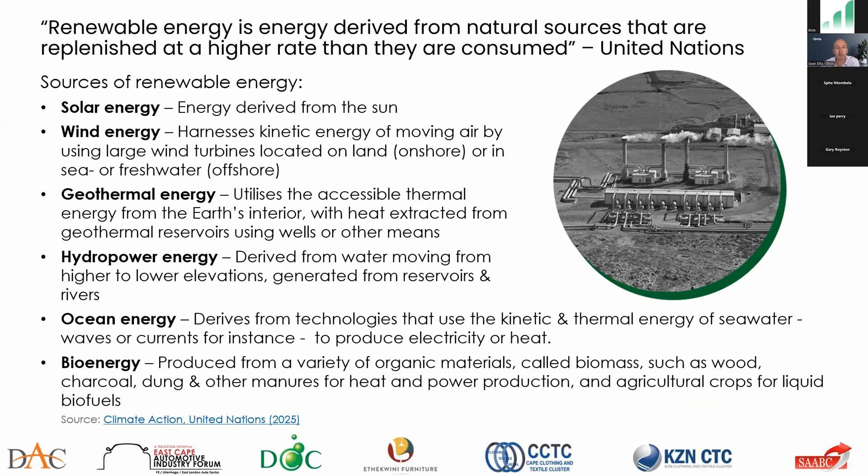There's also geothermal energy, which utilizes the Earth's interior, where heat is extracted from geothermal reservoirs using wells or other means. Hydropower, most of us have heard of as well, derived from water moving from higher to lower elevations, generated from reservoirs and rivers. There are examples in South Africa where dams generate hydropower, which is a form of renewable energy.

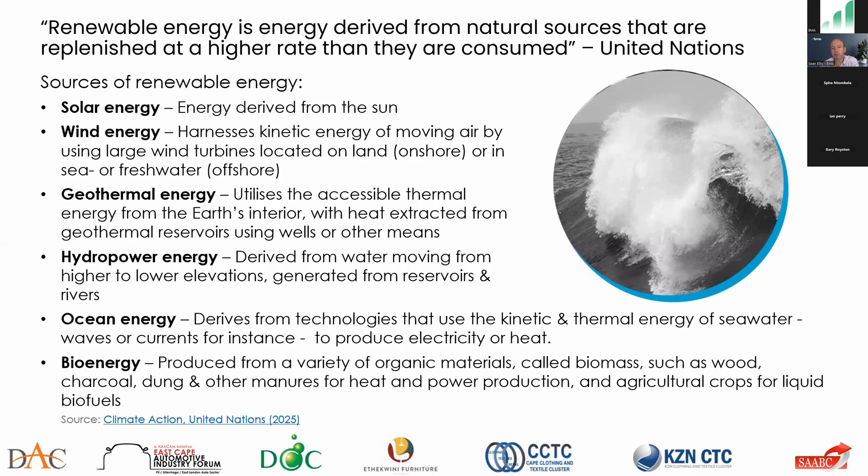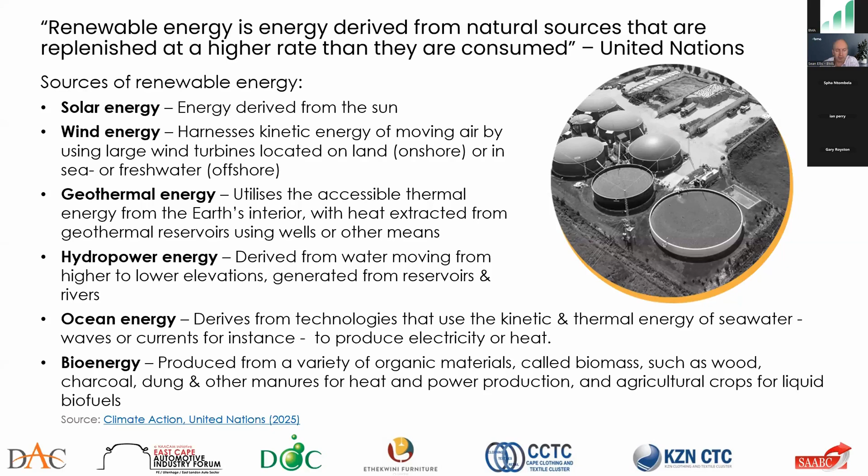Today's focus is on South Africa specifically, and renewable energy has become a very hot topic in South Africa. This is largely linked to the reliance on fossil fuels on the one hand, the need for replenishing energy sources, and the need to reduce carbon emissions on the other. Ultimately, there is a dual focus on finding alternative energy sources, and renewable energy is that alternative source.

In terms of some of the advantages viewed with the adoption of renewable energy in South Africa: it reduces reliance on fossil fuels, creates jobs specifically in the green or renewable energy space, improves energy security—you're able to manage your own energy to a large extent—reduces the cost of electricity and carbon emissions, improves air quality, can support rural communities by generating energy for them, supports economic growth, protects water reserves, and ultimately protects the environment. So these are, at a high level, some of the advantages of renewable energy.

In terms of the reasons, what are some of the justificational reasons firms look to adopt renewable energy? I've listed some there, based on international research. At a global level, incentives would be drivers towards adoption of renewable energy, along with environmental responsibility, energy dependence and security which we've alluded to already, technological advancement, and competitive advantages. These are viewed as some of the global drivers to the adoption of renewable energy.

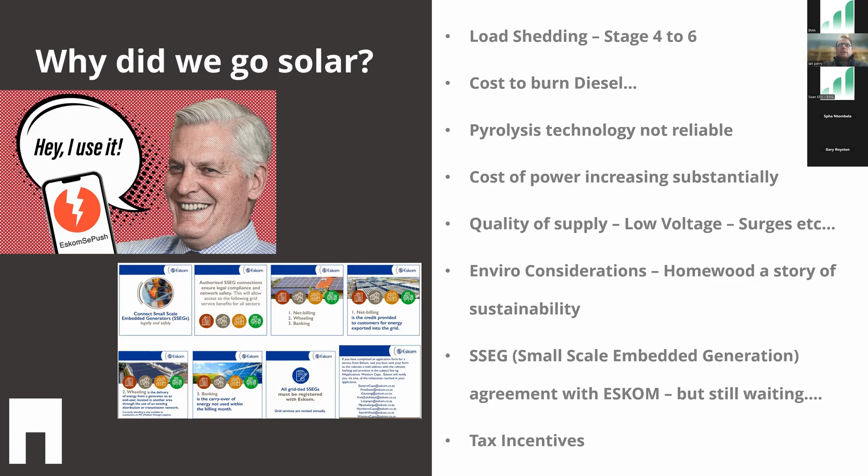So the journey, once we had decided we're going to go solar, the first thing we did was collect data via an independent contractor. They came and put a meter inside our main DB box, and the idea was to measure our load for at least 3 months to see how much solar we would need to generate to at least run a day shift within our operations.

With that data, we then went to various solar suppliers and got various quotes. Once we got the quotes, we had to look at the financing decision, whether we're going to lease to own, finance via a loan, or pay it cash outright.

So we selected a really good supplier called TRRC. They came in as probably not specifically the cheapest, but in terms of the product they were offering and the service they were going to offer, we selected them as the best candidate.

We then went the route of financing via a loan, through the DTIC and the Furniture Competitiveness Fund, which is administered by the IDC. The reason we went that route was the exceptionally low interest rates once we put all the various blend of products together that was on offer. But just a word of warning, if you do plan on going this route, especially getting finance through the IDC, it's an exceptionally long process and very, very arduous.

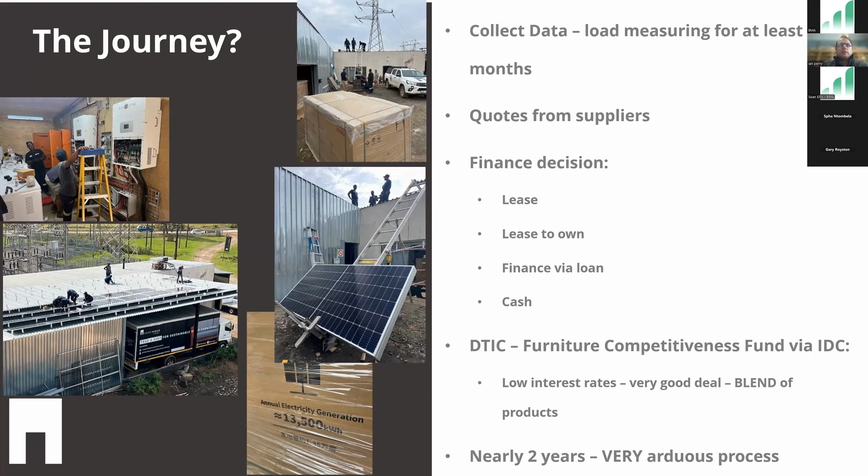Okay, so performance thus far. Our solar system has been in use for the last year. We actually commissioned it in May last year, and this is what we have generated thus far.

Keeping in mind we have a day and a night shift, our PV generation came in at 92,000 kilowatt hours for the year, and our total load was 162,000 kilowatt hours. So our PV generation took up probably 56% of our load, which is exactly enough to keep our day shift going without having to use Eskom, whereas our night shift was fully supported by importing from Eskom.

So I would say in terms of our objectives, it has definitely achieved what we wanted, and is definitely paying back the capital expenditure that we put in.

Quite interestingly, some other stats: our highest production via the sun was in July and October. Obviously the less rainfall you get, the more sunshine you get, the more PV generation you'll get. Interestingly, in those months, if we were attached to Eskom via that SSEG scheme where we could pump back into the grid, we probably would have generated a lot more in terms of PV. Because with this system, if you aren't linked to the grid, once your batteries are at 100%, the PV will match the load, and in some cases our load will average about 70 to 80 kilowatt hours an hour.

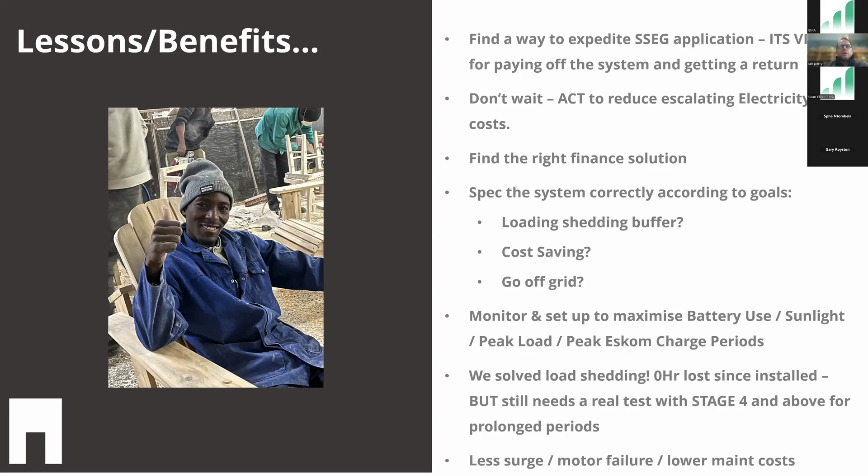Right, so going forward, yeah, our SSEG approval is almost there. Once we get that sorted, we can use Eskom pretty much as a battery over weekends and on sunny days when we're producing excess power. We are also going to be investigating pyrolysis going forward, trying to utilize some of our biomass waste out of the factory a bit better to produce energy.

Our suppliers of our solar system also recommended various things for improvement after monitoring for the last year. One of them was capacity expansion - the big thing with the solar system is if you can maximize your PV capacity, that's great. We will look at doing that in the next year or two to try and get some more solar panels on the roof. Make sure your load management is good, and make sure your battery operation is optimized.

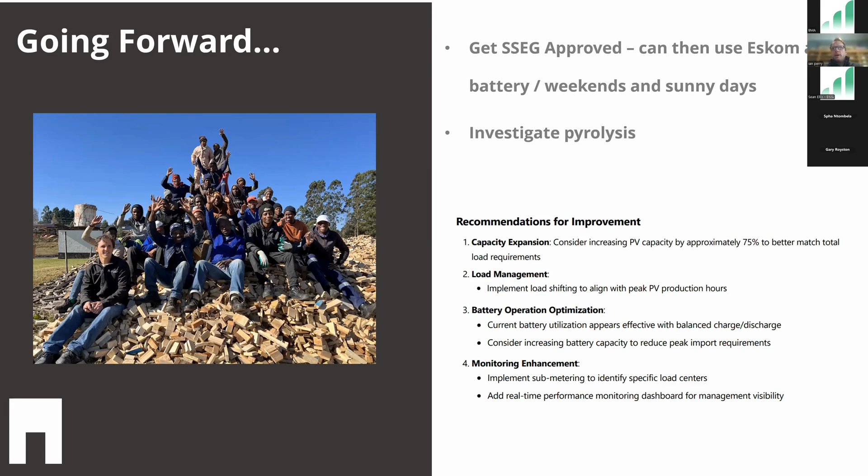So implement sub-metering to identify specific load centers, and then add real-time performance monitoring dashboard for management visibility. Right, and that's it from Homewood.

Thanks, okay, thanks Sean. Good morning, everyone. Just first of all, thanks for the opportunity to share our journey. Ian, I think our journey, as you'll see here, is strangely very similar.

We've seen some very similar problems. Our stories are very similar when it comes to morale, costs, tax incentives, and quality of supply. This is almost going to look a little bit like a repeat, but anyway, this is our story.

First of all, who are we? Webroy is a family-run business established in 1975. We are based in Pietermaritzburg in our facility, which is about 5,000 square meters. We're currently employing 80 staff. Our market, we are predominantly an automotive component supplier, supplying into Toyota, VW, Ford, and Isuzu, predominantly as a tier 2, although we are tier 1 direct to some of those OEs.

Our products and services, as you can see on the right-hand side there, we are essentially a wire company. So we bend pieces of wire. Those take many shapes, sizes, and forms. It could be a spring, which most people will recognize, but it could also be an entire wire seat frame, which you can see in the picture there. We do overmolding or injection molding, some metal pressing. We have an epoxy coating line, and then some welding services - robotic welding, be it CO2 or projection welding. But essentially, we're an automotive component supplier.

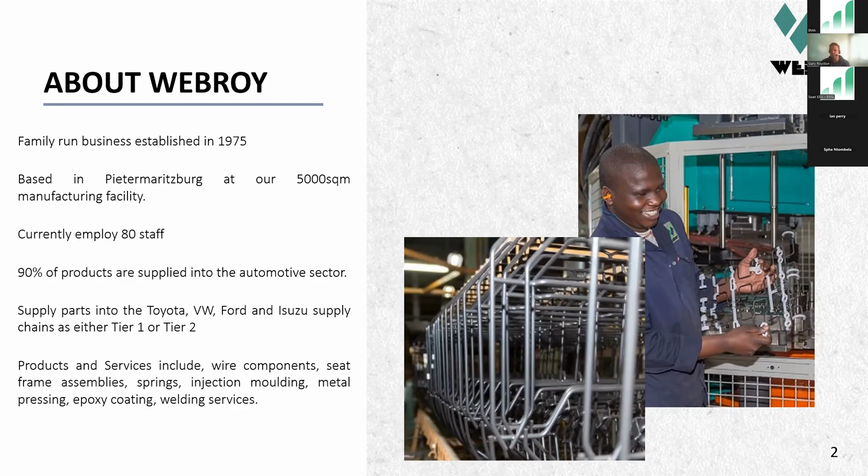Our journey actually consists of 2 phases. We had a first phase in March 2020. In fact, the system went live just before lockdown. That system was 129 kilowatts. It was purely solar panels and inverters, so no batteries at that stage, and it was part of a cost reduction strategy. We did at the time look at batteries and battery storage, but it was just not financially feasible at that point in time, given our power consumption and the cost of the batteries.

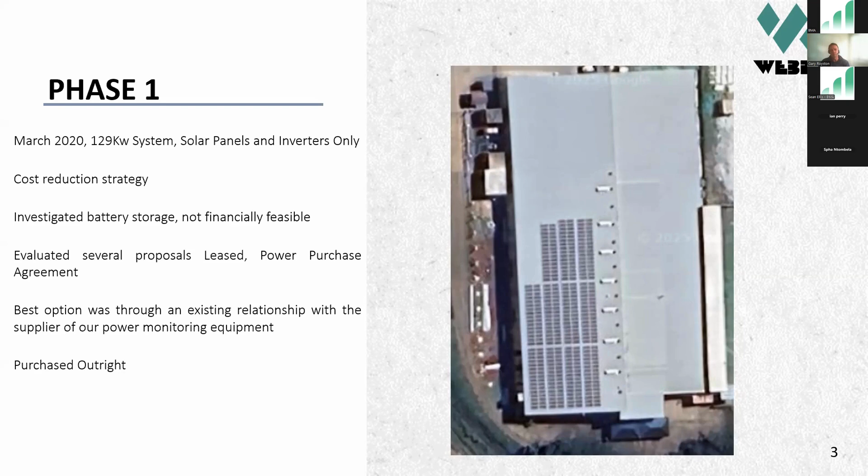We went through a similar process where we did our evaluation. We looked at how we were going to finance it, leasing it, power purchasing agreements. In the end, we decided to purchase the system outright. In terms of evaluating suppliers, we looked at a number of different potential suppliers of the solar, and landed up with an existing supplier who had provided us with some monitoring equipment. So our first phase again was to monitor our usage and consumption, and that supplier would also do solar panels. We had a great relationship, their work on the monitoring had been fantastic, so it was a natural progression to use them for the solar panels, given that the pricing was correct.

So why did we move, or what were the struggles? It very quickly became clear after our first phase that yes, we were seeing some cost reductions, but we hadn't solved the whole problem. We had an energy security problem - while the grid was down, the solar wasn't producing, so we were still experiencing load shedding. The frequency and duration of the outages on our municipal infrastructure was increasing. We were having anything from 2 hours to 5 days, which when you're trying to run a manufacturing business, a 5-day outage is just unsustainable.

Along with that, we did have a generator, so our diesel costs were increasing, our generator costs were increasing, and not only the costs, but more and more from our automotive customers, we are having to align to their carbon emissions and sustainability goals. So while we're trying to improve on these, we're burning diesel in the generator. We also had some staff problems - you can't blame the staff, they've just arrived for a night shift, and an hour in, the lights are out, and we're asking them the shift's cancelled, we need to go home. It wasn't creating a really positive environment in the factory.

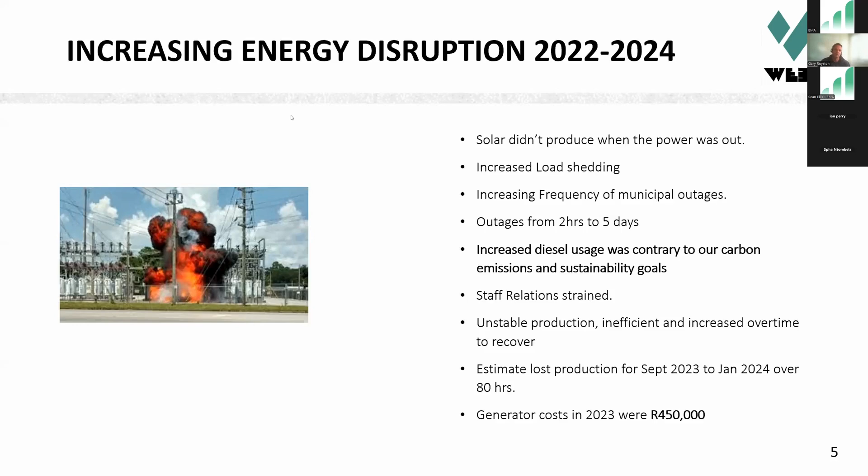So this picture is why we decided to look at other options. We started by looking at, well, should we move? Because a large part of our problem was infrastructure related. We quickly decided, well, where do you move to? Everyone has load shedding, and most areas seem to have a similar infrastructure problem. We looked at larger generators. We looked at hydrogen generators, which the technology just didn't quite seem to be there, and again, no one to really support it.

We looked at more solar panels. We looked at wind generation. And in the end, we landed up with a hybrid solution, which was an extension of our current solar, but included batteries. So the battery cost had dropped dramatically.

So this system that you're seeing is our chosen solution. We extended our solar panels by an additional 177 kilowatts to bring us up to a 300 kVA hybrid solution. We've got 2 x 150 kilowatt inverters, which you're seeing in the pictures on the right-hand side, as well as 600 kilowatt battery storage to store power. We've also introduced phase balancing, power factor correction, and harmonic filtering, all very clever stuff that I don't fully understand, but it certainly provides us with clean power in the factory.

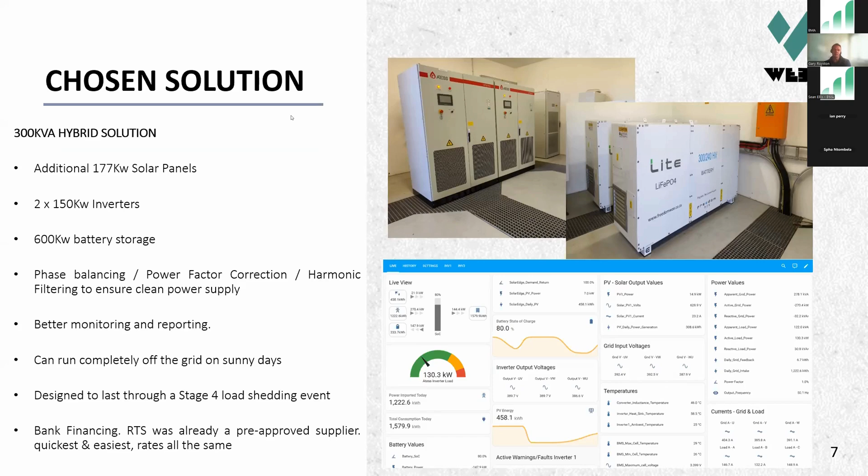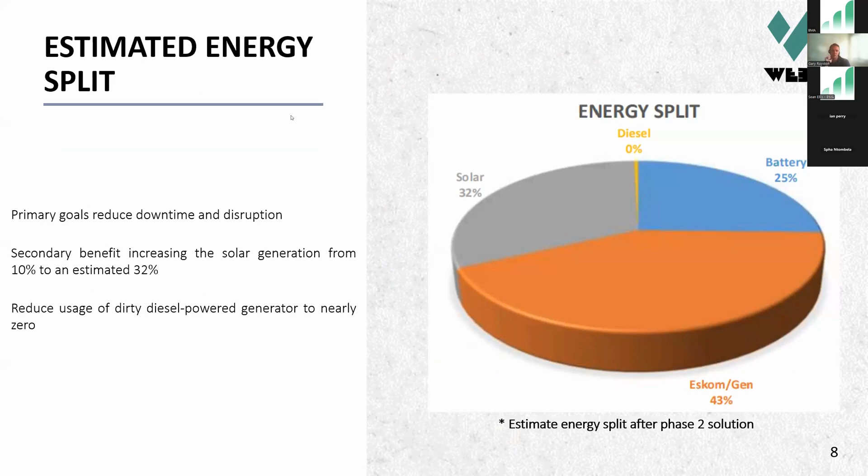One of the other big elements of this new solution was to try and increase our solar generation, from roughly 10% up to 32%. And the big one there, you can see on the right-hand graph, is we're estimating very close to zero diesel usage, unless we have a complete prolonged outage, which at the moment is tracking fairly closely.

So our phase 2 implementation, we started in August 23 with all of our municipal and NERSA applications. That was probably the most time-consuming bit of it. We had to build a new substation that started in January 24 and was completed in April 2024, where we started the solar installation, and we went live in June 2024.

The benefits for us so far, we've seen no unplanned outages since July 2024. There is obviously the reduced load shedding, but in the same period we have seen an increased frequency of municipal infrastructure outages. So it's been fantastic there. Our stability in terms of production has been great.

We've also utilized the system on a time of use tariff with the municipality. We have 3 hours in the morning and 2 hours in the afternoon where we pay peak rates, and we've managed to almost completely reduce those peak hours. Where we were averaging 12,000 kilowatt hours a month before the system, we're now down to just 1,300 kilowatt hours in the peak, saving us over 10,000 kilowatt hours. And when you realize in winter, for instance, that's over 6 rand a kilowatt, and those tariffs are increasing drastically, 75% for us since 2020, we're really seeing a great cost saving there.

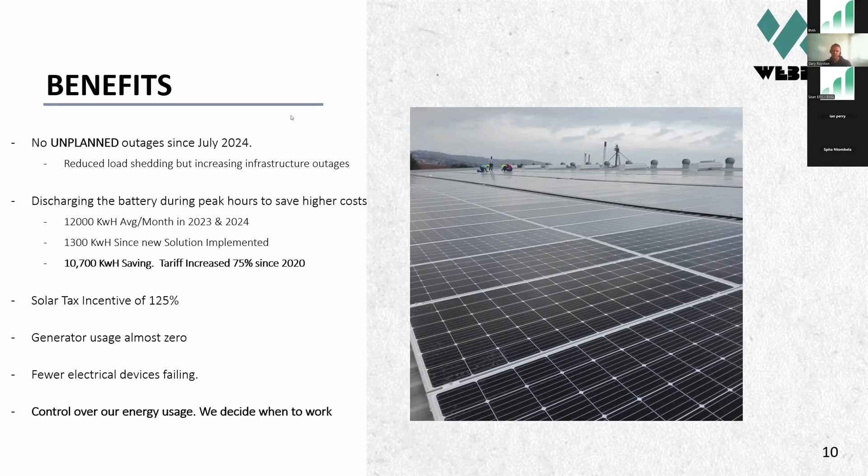Can we get through the day shift on sunshine and run a night shift on the batteries? But it's all within our control, so it's great to have that control back and be making our own decisions.

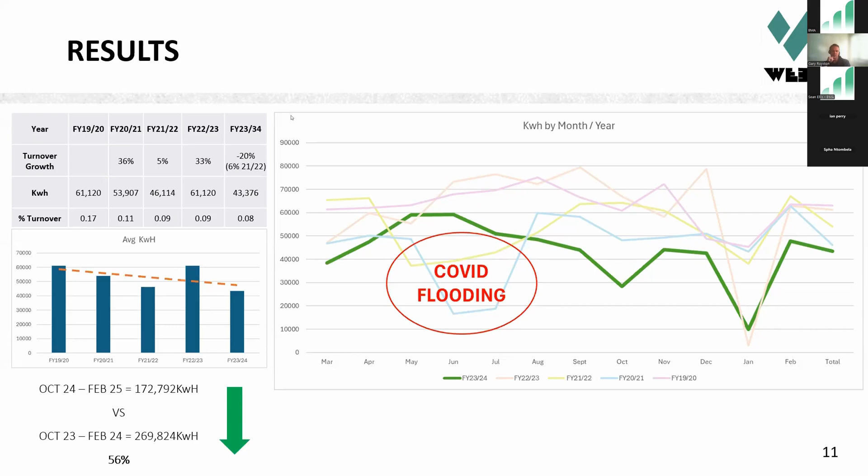If we look at that same period in 23, 24, we've saved 56% on our usage. Now some of that is demand driven, but it's a great reduction in our usage, and we look forward to seeing how that maps out in the next year.

Just a quick note about maintenance. Obviously cleaning of the panels is very important, and this is all about maximizing your outputs. We have taken on the cleaning of the panels ourselves, so all of our machinery is on planned maintenance schedules, and we are cleaning the panels every 3 to 6 months, depending on the season.

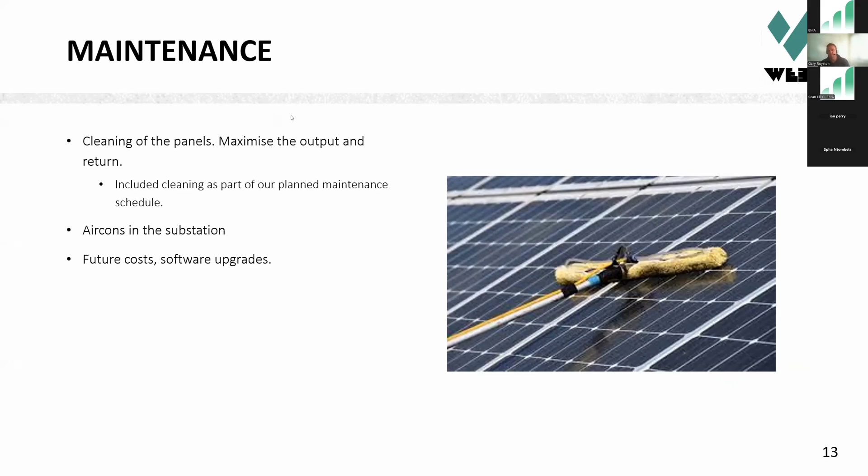Now, while it's raining, we don't clean them quite as often. Come winter and it's dry and dusty, we'll clean them more frequently. We have also had to install air cons in our substation with all of this equipment generating quite a lot of heat, so we have not only the costs of the air cons but the maintenance of the air cons. And then we are predicting some future costs around new software and software upgrades, just to make sure the system stays up to date and working in an optimal environment.

Our future plans: since July 24, we've produced and saved 155 tons of carbon. We are still planning to put our excess power back on the grid, and as Ian said, this would really help us maximize the payback on this solution.

Unfortunately we aren't Eskom direct, we are through the municipality, and that comes with some extra complications in terms of them buying back the power. So that has been a long road for us. In fact, we've been trying it since 2020 when we did our first system.

We have also made an application to Eskom. They have a peak period buyback scheme, so where I mentioned earlier the 3 hours in the morning and the 2 hours in the afternoon, if you can save electricity in those peaks, Eskom will essentially buy back that power from you.

At last count, for every 300 kVA you save in those peaks, they'll buy it back at about R1 million over 2 years. So we are looking to sell back the peaks that we are saving to Eskom.

We've seen some software upgrades and new software available within our system which extend the smart system we have. It's starting to use AI, so you can load the weather forecasts and load shedding schedules in there, and it will predict your yields, usage, and requirements going forward. For example, if it sees load shedding coming, it will prioritize the battery for load shedding rather than using it in a peak.

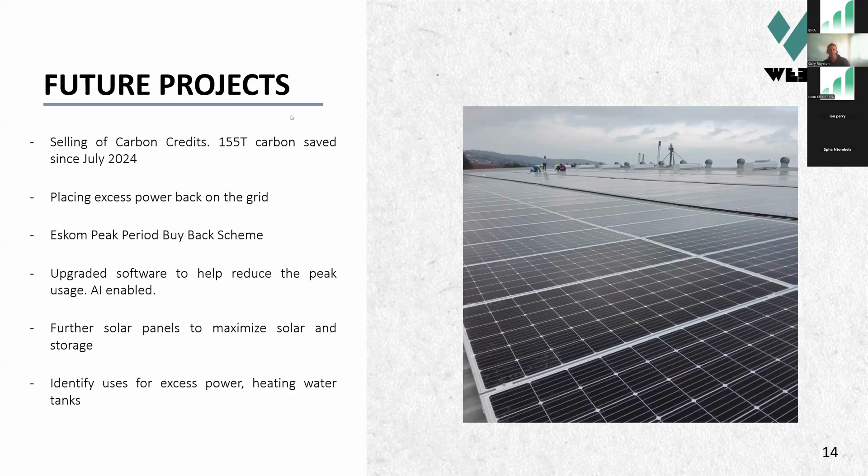Just to finish quickly, and this is a lesson we've relearned that we all touched on in the beginning, we started with monitoring. As we've gone on our solar journey, you get into thinking we've got solar, it doesn't matter. But from a sustainability point of view, it's about making every watt count. So you go back to the first step, which is about the importance of monitoring and measuring, because ultimately the less we use, the better from a sustainability point of view. And that's the end of my slides, Sean.

Excellent, thank you very much, Gary. Like Ian, a very good presentation in terms of Webory's lessons and insights into the journey and the benefits that have been derived, and obviously also the future focus areas, which I thought was really, really good. So thank you very much.

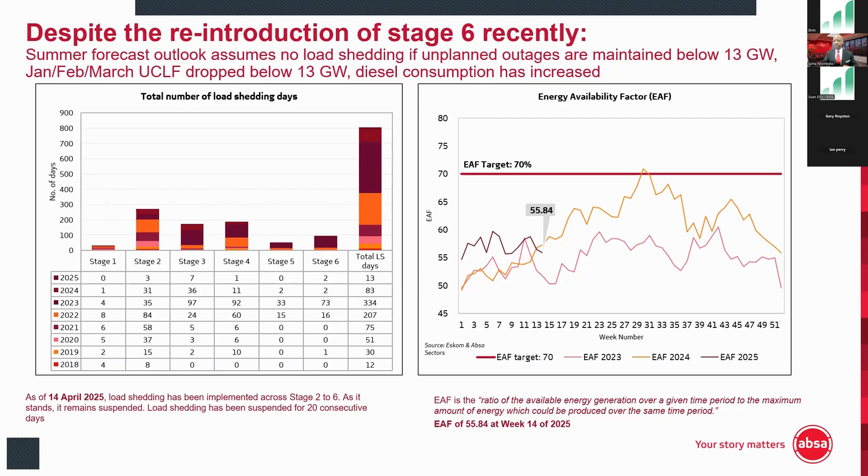On my side, if you're not convinced by these organic stories, let me help you. The next 3 slides give you a rundown of the important stuff you need to look out for, what has happened currently with load shedding. If you look at the different years, how load shedding has been, 2023 was the most frustrating year when it comes to load shedding, because we had 334 days, almost the whole year of load shedding. This meant we needed to get serious help when it comes to that. And if you look at energy availability, only in 2024 we've been able to reach the 70% that is required for energy availability, but all the time we are lingering below. This is why currently we're sitting at 55.84 in terms of availability.

Which explains why we're going to speak on the following slide. The following slides also, am I seeing a hand? Sorry, I don't know, Sean.

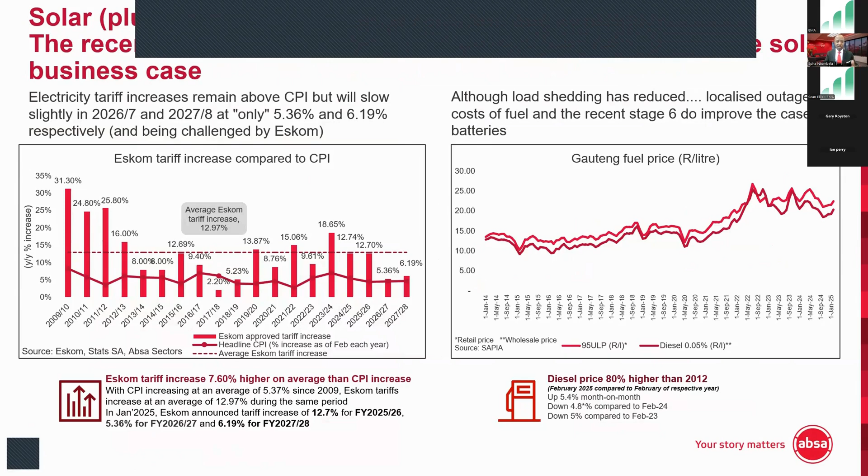So also briefly here to give an alignment to the story that Ian and Gary have shared. If you look at how the tariffs have been, all the way from 2009 to now, there's been a lot that has happened, and electricity is very expensive at this stage.

I think you can read these for yourself because it gives you an ideal view of what has happened in the space. The average Eskom tariff is sitting at almost 13%. That tells you, even though the graph shows it has gone below for the next 3 years, as has been announced: this year is 12.7, then 5.36, and then in the following year 6.19.

But still, it's a huge cost for your business, which is why you do have a case for yourself, for your business, to investigate if you need to have this tool on your side to help you save cost.

And also look at the cost, and the last story that Gary was sharing, to say they're seeing a reduction in how much they're spending on diesel. If you look at how much is being spent on diesel from 2012 to now, it's an 80% increase. How much are you going to spend on diesel to try and get your electricity going and get your production going as a manufacturer?

So it gives an ideal view to say you can actually save through this option.

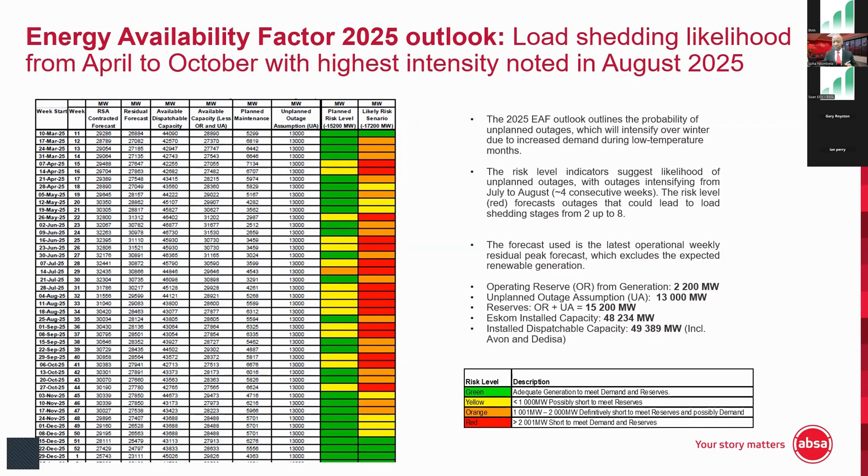So it helps us to have a view, also in terms of us as financiers, to say what is happening in the space and what does it mean for us and our customers. This is why we are able to do the forecasting on our side.

Maybe the big question on your side is, why choose Absa? So currently, what is happening in our space, we've got dedicated sector expertise, including myself, countrywide. We are able to support you, working closely with you as a business, and give you valuable insight. If it has to do with thought leadership, we are there on the ground. We are able to speak to you.

As I said, expert driven. Our renewable energy team offers a lot of insights and strategies, and we are able to hold your hand in terms of making you understand who are the installers out there in the market that are reputable. Because what we do on our side, we actually vet the installers and give you an overview, saying within your area these are vetted installers that you can look at. However, it remains your prerogative to choose.

You can come with your own installer. We are ready to finance as long as they meet certain criteria, because at the end of the day we want to make sure we cover you as our client in the space. We've got experience of over 10 years in this space. We've done over 1,500 projects, and still counting, across South Africa.

And we've got sustainability initiatives that we have. We've got certain goals, and over a certain period we want to make sure we meet those goals. We've met certain goals already in the sustainability initiatives as Absa. So we're going to continue in that space.